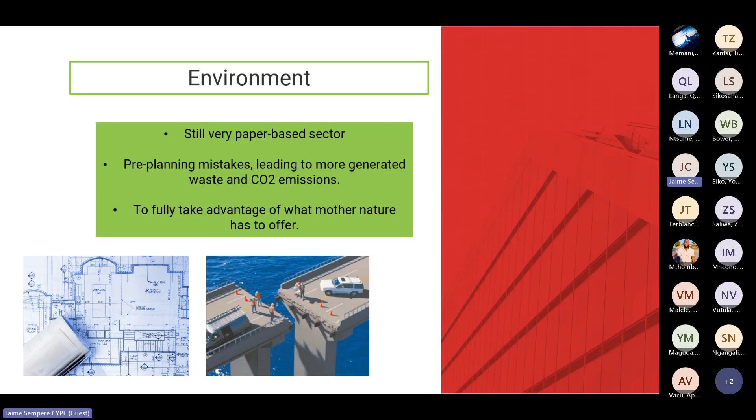And let's not even talk about mistakes in planning from not being able to visualize and properly view information, leading to waste or CO2 emissions. You have no idea how expensive it is to take down structures, or how much waste you can generate, or CO2 emissions from a structure that's improperly designed. In 2025, all structures and projects in Malaysia and many parts of Asia will have to present carbon CO2 emissions released by their projects to get approved.

And then the next one, which should be the most important, is that when you digitalize and use OpenBIM, you're able to pre-visualize at many points your project and fully take advantage of everything that Mother Nature has to offer—to use solar panels, to avoid direct sunlight in certain areas if needed. I'll show you how this is done by creating BIM projects, by creating a digital project, because it's not just a 3D model, it's a 3D model with information.

Now, the next one is government, and like I said, this is what's going to get everybody going because nobody's willing to do anything until they get fined by the government or aren't able to work. So very soon it's going to be mandatory in many parts. A lot of you working in or studying in South Africa are going to end up going to many parts of Europe, because they know there are a lot of good engineers and quantity surveyors, etc., coming out of South Africa.

So it's common to go into other countries, and you're going to have to face this and know how to use this because it's going to be the law. It's important to learn a common file and use the common file, which is the one that's being accepted by governing bodies, such as the IFC file, which is industry foundation classes, as I mentioned.

And why does the government want this? Well, like I said, this is the entry point into smart cities and future access to information. They're going to be able to access information in the future and be able to use augmented and virtual reality tools and all of that information that's inside the BIM projects.

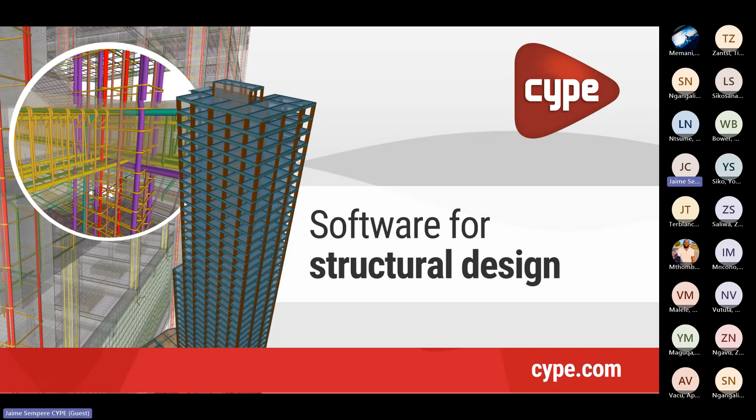Now, in the software, also, you're able to design not just general stuff for your structure, but you could get into details. You're also able to use software, and this software is also free, and this software goes very well with the architectural programs.

For once that you have designed a structure or an architectural model, let's say, now you're able to enter construction elements to that structure, and you're able to do an energy simulation and analyze how much energy consumption you're going to consume. You could calculate the entire energy demand for that for the entire year.

Okay. For any part of the world, it has actually this program loaded, the Energy Plus engine, that it has pretty much any part of the world for you to do this energy calculation.

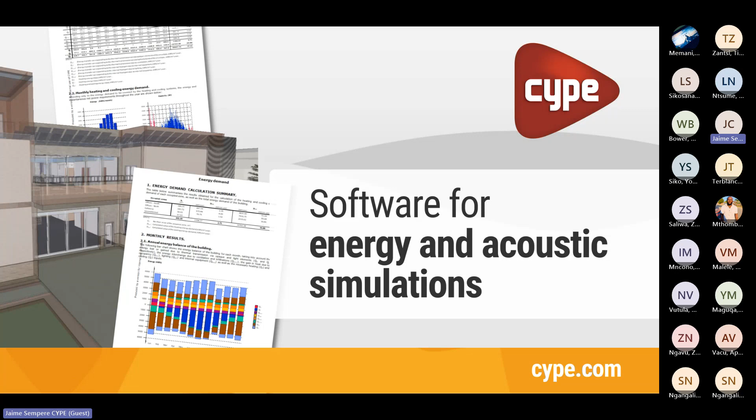Then, once you've figured out how much energy demand you have, you can design your electrical installations, and you can also install photovoltaic installations as well. And since you have designed the energy consumption needs, the program will automatically read those needs and design based on those needs. It's not just like click and that's it. You gotta obviously have some knowledge to preset the program properly, but it will recognize the energy consumption.

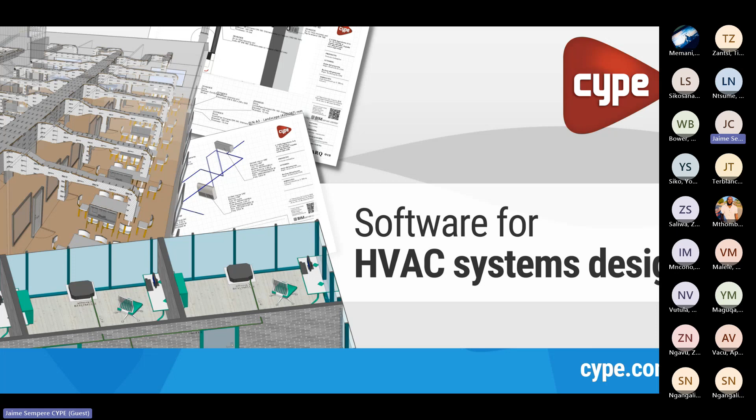Okay. For HVAC, the same thing. You're going to predetermine your thermal load consumption, how much your heating and cooling needs are for your structures. And when you design your HVAC, as you design it, it will be based on those needs that it is recognizing from the area because you have pre-designed that area with a BIM solution.

And I could go on and on with the rest of the installation, but I think you understand it, and fire, pretty much the same thing.

Now, the last one, and one of the things that I also think are very, very useful for you, is that you can do a lot of project management things with this as well. At any point of the structure, it could be the project management part at the structural end, or only at the plumbing, only for HVAC, or for the entire project, okay?

You could do two things. You could design all your health and safety, but then the other thing is that you can create or load a cost database, and you can generate a BOQ quite easily with the software.

Now, if you're working with a BIM model, guess what? All of the geometry and all of the measurements are automatically imported, not just the amounts, but also areas, and it could recognize measurement for the entire area. But again, if you're working from a 2D CAD drawing, you are also able to import that drawing and measure and link it to the cost database, which I will show you as well.

Okay. Now, as I said, how does this happen? Well, CYPE develops the tools that can design and can analyze whenever possible. And once they do that, either one or both, they create a file. It's a BIM file because it's a common exchange file. We're creating an IFC file. And you are able to share this file in BIM Server Center.

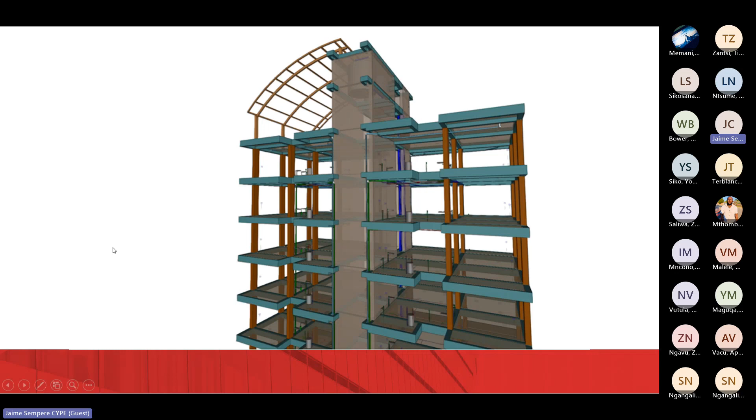Now, as I said, the project can be done of many parts, just one part, but pretty much a BIM project can be everything, including, believe it or not, even appliances. So when you design, or even the toilet, the sinks, when you are working in a BIM project and it recognizes the consumption of that element, it will require a pipe with X consumption, and if not, it will tell you it's wrong because it is recognizing by the BIM model the consumption of that appliance or that particular part of the toilet or kitchen, okay?

So now the way that this works is that every file is a separate file. They are all federated files, and some of the things that people think about when they work with this workflow is that, oh, they're going to steal my information. No, that is impossible. Whoever creates the project is the one that controls the project itself.

But now, if I am an architect and I give the plumber my architectural model and I tell him, okay, design the plumbing for this project, he designs it based on my digital model, my BIM model. It's actually my architectural BIM model, because that's where you've got to start from, some geometry. And he gives me a design. The design that he gives me is controlled by him. All I can do is view it. I can't make any changes.

And now, if I have 3 or 4 people quoting me different options in plumbing, they can all send me those options and I'll visualize and choose which one I like best, and then I will lock it into my project. But they are all loose, federated models. So, like I said, a BIM project in BIM Server Center or in any true BIM tool has to be open to as much or as little information as you'd want. And that's what we offer, okay?

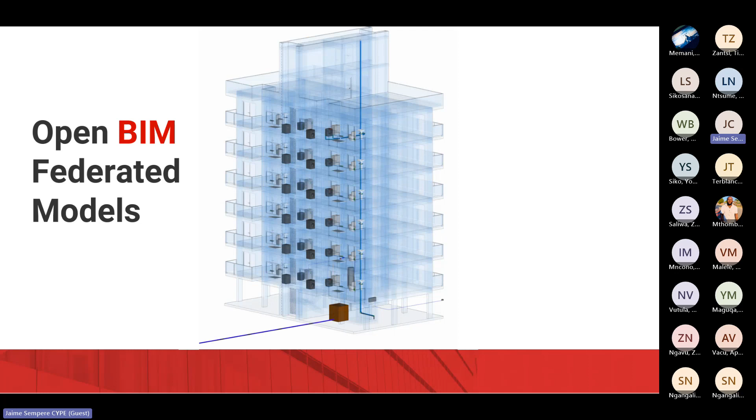As you see, you're working with federated models, so it's impossible for anybody to take any of this information from you. Now, some people think, will I need to change the way I work? No. If you're working right now with other tools, there's no need to change. There's multiple workflows that are very versatile with other solutions; you're able to import everything from a PDF file, JPG file. There's many things you're able to import and have as a starting point, even just a Google Earth picture, etc.

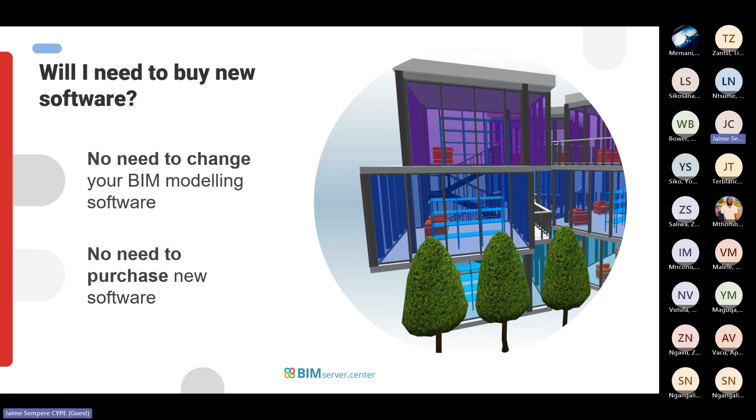Now, people wonder if to work with BIM Server Center, you need to buy anything. No, nothing needs to be bought. Some people wonder why. Well, this was a project that we brought forward after an investigative study with the European community. And one of the things was that this was going to be a fully free platform to actually take advantage of what BIM is supposed to be. And that's what we have done. There's no need to purchase software or anything to use the workflow, okay?

Will I be linked to a special modeler?

A lot of people wonder, because let's face it, most of you are probably looking at this now, and even though we have over 150,000 users worldwide, well, that's nothing compared to Revit, Graphisoft, Allplan; they're obviously massive companies. So if you're working with any of these programs, you're also able to generate a file. With Revit in particular, it's a direct plugin from Revit into BIM Server Center, and it's free, and you're able to share Revit models, the geometry, with Graphisoft, Allplan, etc.

If you want to use a free tool, we also have one that you're able to use, and I'll show you today. It's very simple and quite intuitive to use. Now, these are some of the worldwide companies that use our workflow. I just wanted to share it with you so that you see. And we also develop tools. We develop open BIM tools for a lot of these companies around the world that need open BIM solutions. So we develop their open BIM solution as part of their programs. Mostly here, we're talking about MEP tools that we're developing for these companies.

So with the tools that we're going to show you during our training, all the tools of CYPE, you're always going to be able to generate a 3D model. You're going to be able to generate technical reports. Now, these reports you can print on paper, which is not the ideal thing to do, but if needed, you're always able to do it. Or you're able to share this information in the cloud in a PDF file, and you're able to access it or share it with government institutions as well in a digital format. You're also going to see a lot of visualization tools in our software for you to be able to make the right decision.

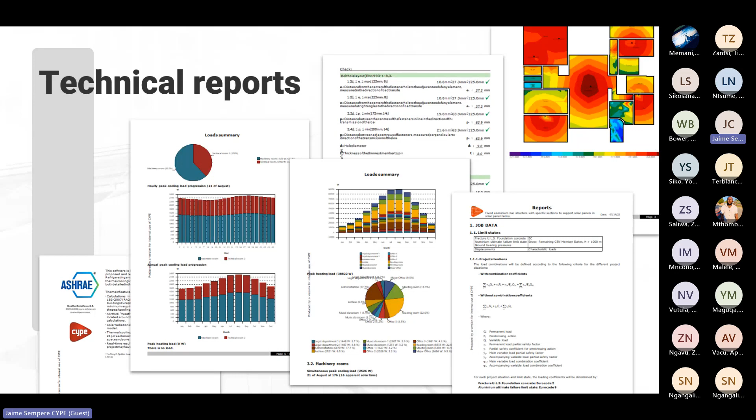And you're also going to be able to generate plans, as we understand that plans are still necessary. So you would be able to generate plans, customize drawings, and these drawings you could have available in the cloud, or you could send them to print. It's also possible, and it's free with our software. And then lastly, you're also going to be able to generate a BOQ.

I just wanted to mention one project that was done with our software. I don't know if you've ever heard of this project, Johan. This is the tallest residential building in all of Europe. It's over 650 feet tall, and it's actually just 20 minutes away from our headquarters in a city called Benidorm.

I was at a conference in Lithuania, and some guy told me, "Oh no, but in the UK there's a building." I just told him, "Look at my slide. It's the tallest residential building in Europe." As we know, the UK did something called Brexit and is no longer part of Europe. This is great for us because we're able to say it's the tallest building in all of Europe. There's nothing else other than the ones in the UK.

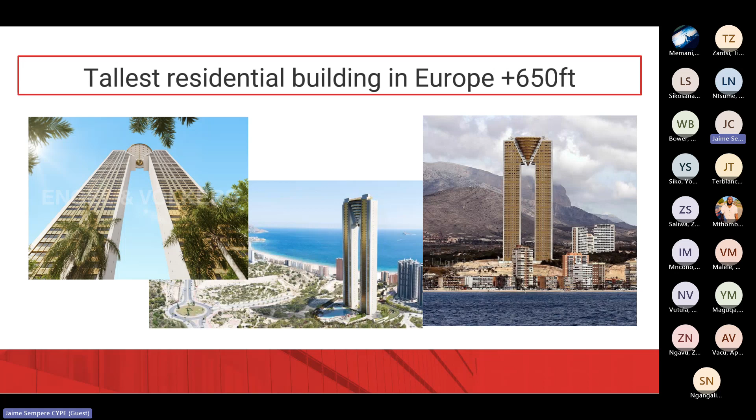But it's a building called Intempo, if any of you look it up in Benidorm. And the whole building was designed and analyzed by one of our owners. So it's just a really interesting project. Now, how I always like to give people the idea of BIM Server Center, of what I'm going to show you, so you get a good grasp of what we offer as an open tool, is, believe it or not, this here.

I don't know if any of you ever watched Power Rangers, but this was a series that my kids used to watch when they were younger. During the episodes there were separate superheroes, but at the end of the episode, they would all gather and become a special superhero that could do everything that they needed. Well, that's what you could do with BIM Server Center. It could be a customized tool for exactly whatever you're doing, whether that's structural design, architecture, project management, only designing the BOQ, etc. And I'm going to show you how that's going to happen.

Okay, so now the first thing that I'm going to do, let me just confirm that everybody's still seeing my screen, I presume, right? Because I saw that there was some sort of change happening there.

Yes? Yes, I think we can see your screen. You took your screen down and now you... Yeah, now I have my part here. Okay, just my home screen up.

Yeah, all right. So, anyways, the first thing I'm going to show you is what the CDE platform is and how to start a BIM project. You can see here on the right of my screen there's a bunch of different loose tools. These are different BIM tools that I have downloaded and that I use, okay?

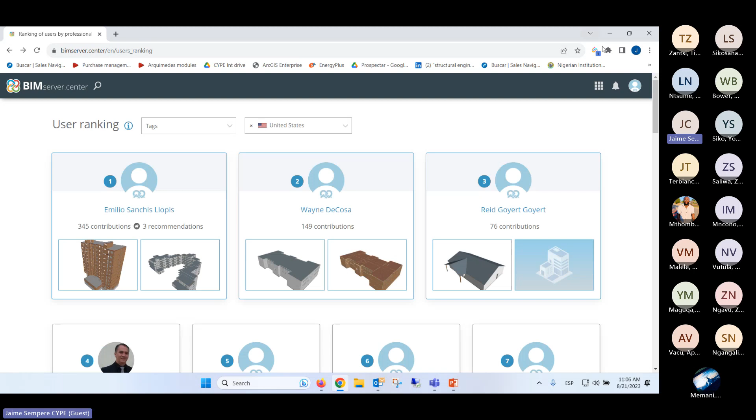Let's look at the important stuff of having a BIM modeler here. Okay, so what happens in here? I have the projects that I have shared that I've designed with some of the tools that I'm going to show you now. In a few minutes, I'll start showing you some of those tools. Anything that I designed in there is going to be here. Any projects that I've started, etc. And that's what I'm going to go ahead and show you.

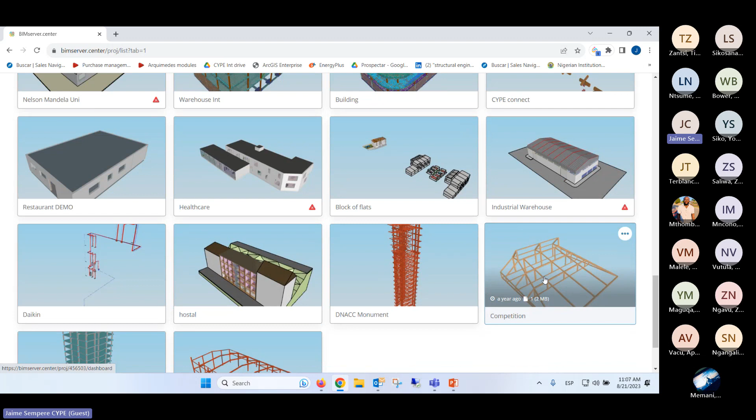And now this will be the same thing I'd be able to access from a cloud. From any cloud platform, I will be able to enter and access and view any of these projects. As you see, some of them I have an entire structure here of a short span bridge. Here I have a culvert house. I have steel structural elements. I have mixed warehouses, but I also have, for example, just complex connections that I designed. I can have also here a project that is a truss roof. There's no limit in this, is pretty much the idea.

And now I'm going to go ahead and just give you an idea, like this project that we did at one point called South African Experience. And here we have the dashboard, South Africa's BIM experience that we did at one point. And here we have activity, information, etc. So in here I have the visualizer where I'm able to view the whole entire model. I could see everything in one shot here, or the viewer allows me to pick and choose certain models.

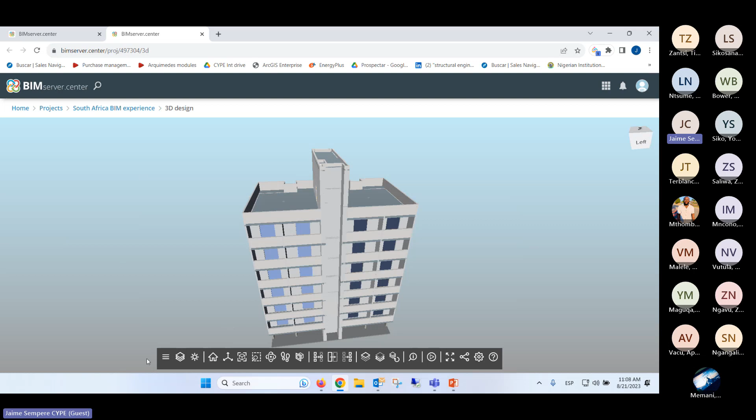You see, I can have everything visible, or I could just ask for the architectural model, press accept, and that's it. I only see the architectural model. Just here so that you see a quick example of this. But now obviously there's more things that you're able to do with this. It's not just about visualizing this model, because there's obviously a lot more things that you might want to be able to visualize. In here you have the dashboard where you're able to view the model and see everything one on top of the other.

Then you have a notification dashboard. In the notification dashboard is where you can visually create issues that need to be resolved, or automatically you would create issues via clash detection software that we also offer. In the contributions tab, you would have all of the different files. You see they are all loose, separate, federated files that make up this project, from the architectural stairs and ramps, the carpentry. The great thing is that once you have the architectural BIM model like this shared with your team, now everybody can start designing based on that geometry.

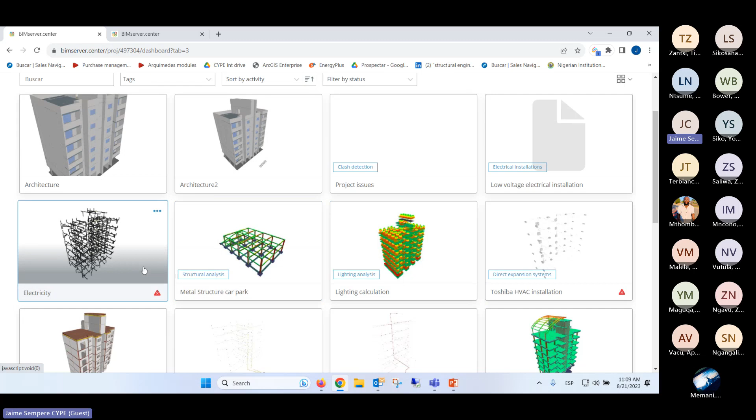Let's say we have 3 or 4 different designs for both the doors and windows. Once I decided which one I want, I lock that one in place, and that's it. And I have all this information that I'm able to view from any viewer around the world. I can go into any platform and see all this information, wherever it is. So you have all of these different files here inside this cloud for you to visualize separately as well. And then here you have your work team.

And your work team is very simple to use. This is the work team that exists right now. I'm able to just go in here and look for people. Obviously Johan's not here, but if you're registered in BIM Server Center, I will be able to search for you, and I would be able to easily invite you, or I can copy the link and send you an invitation as well. It's very, very simple.

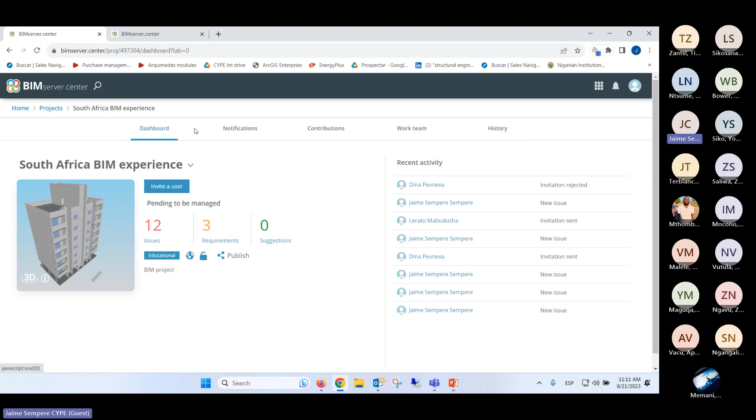So the great thing is that one of the things I always needed to do is keep information, make sure that everything was registered. And this was always doing this automatically for you. So any information that you share via this platform is automatically going to be registered. So I can, for example, say, okay, I have an issue right now with the architectural model, and I could

just put architectural, let's see, windows need to be placed 3 cm from the edge. Okay, and now I can say, okay, so who do I have? Do I have the architect change the entire building, or I just tell the carpenter? That's it. I inform the carpenter.

Here I give him a little bit more information. Please place the windows, let's say it's on the last floor, 3 cm from the edge, and I could give him all sorts of instructions here, okay? Now, let's say that I have to show him because I want to give him a little picture of this and tell him what exactly I want him to be looking at, okay?

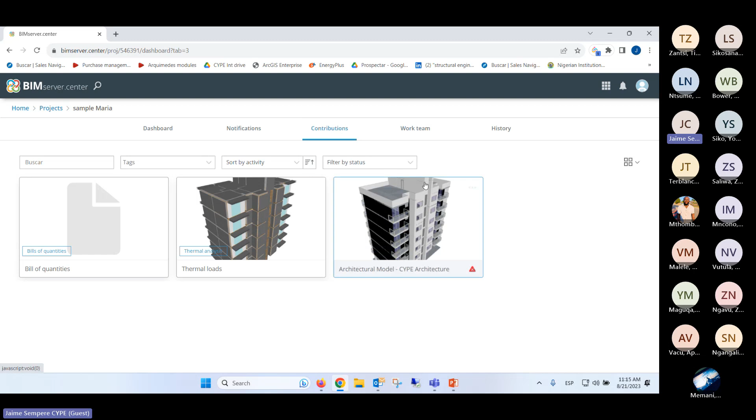Well, it's not only information such as models for visualization, but also paper, to be able to access files. So you see, this is the same building, but in this model, I only have an architectural model. I have the thermal loads design, and I have the bill of quantities.

So you see, I'm able to design my bill of quantities and then create a BOQ summary, cost breakdown, detailed price, all three of these, and just share these in a cloud for me to be able to visualize anywhere and print if I so need, or present to an administrative governing body what I'm doing. There's a lot of different options, and it's not just documents, it's not just visualization of a 3D model, it's also all the information that is within.

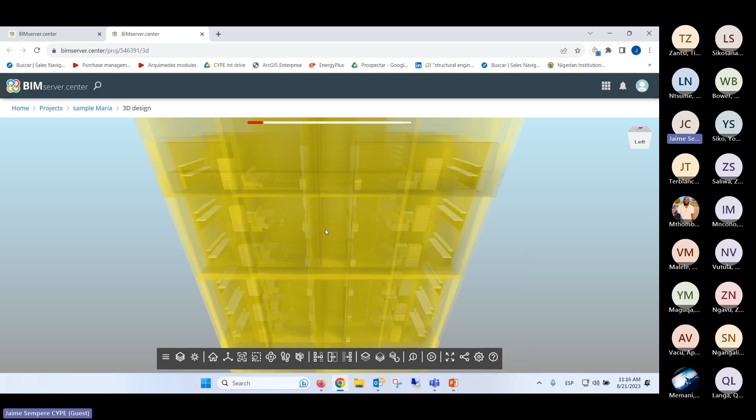Okay, and now I'm going to show you, when it comes to the visualizer, you have some very handy tools that are going to be excellent for you to determine the location of your project. And you will see here in this model that I have shared what is the I in BIM, and that is the information inside the model. Now, a building model doesn't have information of each and every part of this project, and that is the big difference with these models that I'm showing you now here.

So you have a section that says I for information, and if I come here anywhere, it's going to tell us what it is. Let's say this here, for example, is a railing: the height of the railing, type of category, the spacing, the handrail dimension. There's a lot of different things that it's able to see. Now, it also gives me the opportunity to remove areas, so I can go here and say, okay, remove this project.

I've already taken that into account. Let's see the next one. Okay, I've already got this one. Or I could just say, remove everything and just leave this for me to visualize this particular information, or this particular model. It gives you an option to isolate an element, hide an element, or show all of the hidden elements.

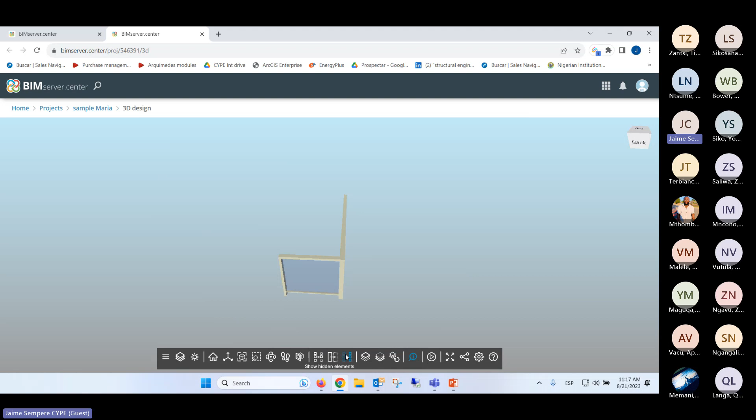Now, another very interesting thing for this modeler is that you have information on all of the different parts of the project, including the louvered walls. These are external windows. It tells you, every single piece of information is here. And also, it's able to set the shadows of the building.

Based on the position, I have a way of locating the project. You can actually locate it here, or if not, we would show you a way for you to obtain the location of it. This one is already placed, and I can activate shadows, and show the position of the sun as well.

So this is based at 12 p.m. on the 21st of August. It always goes automatically on the day we're at today. You will see, based on the sun position, this is the type of shading that I'm going to expect. Now I can easily change this by changing the time. Say I could just change it to 9 in the morning, press accept.

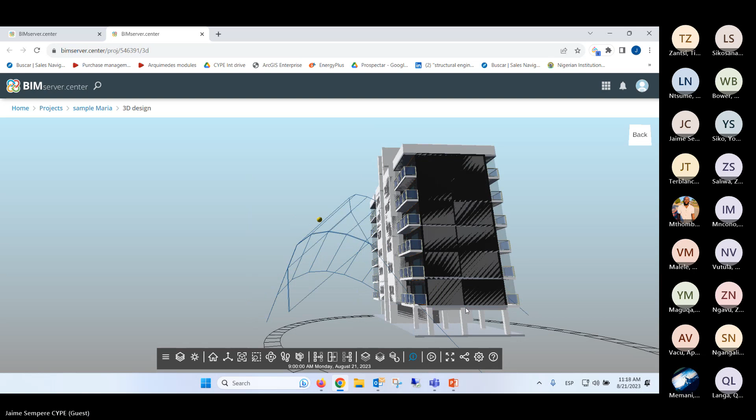I think you got the idea here. You could put it later in the afternoon.

You're also able to have the program check all of the different... I suggest that when you go here into BIM Server Center, we have this here for you to know how to rotate the camera, like what I'm doing to rotate this, you can change it. It's either Shift key plus middle mouse, or Shift key plus left mouse. You can switch it to that.

Also, if you have any questions regarding this, for example, you can see you rotate, hold down, move, hold the middle button, so it gives you different things for you to have an idea. And for shadows, if you hold down the Alt key and drag while pressing down the mouse...

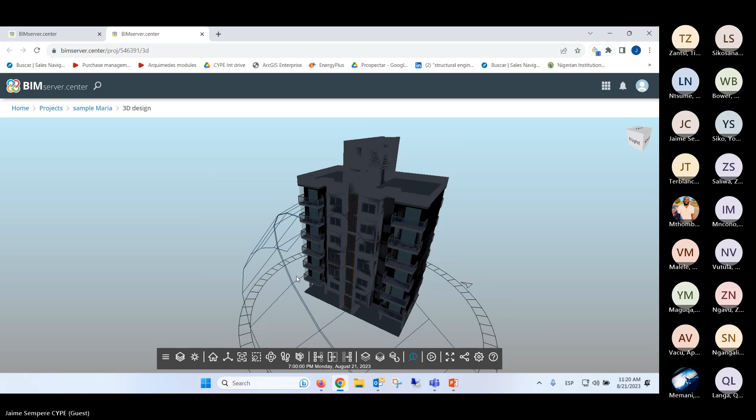So you will see that if I do that, I can automatically move the sun in one shot and check the shadows. Okay, let me show you this model, for example.

We have a section where they share models with us as well, and you're able to access them. I actually have not contributed to any of these, but these are shared models for me, and you can see there are some really nice models here. But there's this one building that I wanted to show you that I think is quite interesting for you to view.

Actually, sorry, I did contribute to this project, so my mistake.

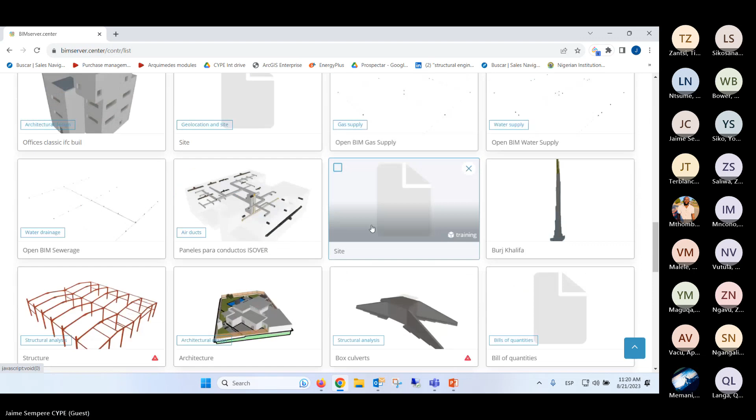All right, let me just show you one last thing with this, and then I'm going to go ahead and open up the first tool for you guys to see.

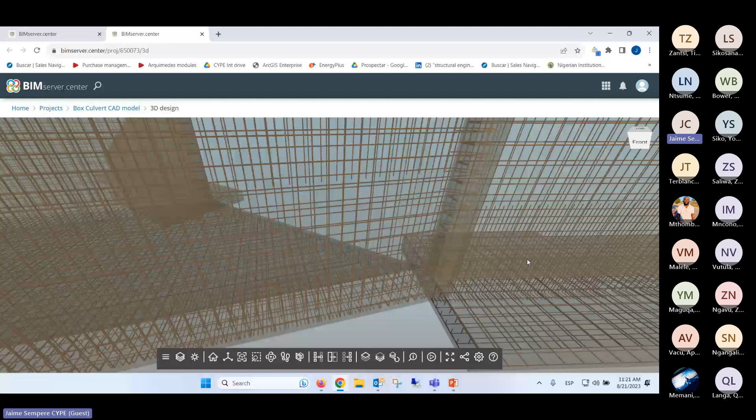You will see that it's not just random stuff that I'm looking at that has no value in a project. If you're designing this project, and you are working on a culvert in the middle of nowhere, well, hopefully you have access to internet at least at some point.

You can enter and just check the exact steel that you need to be using, to make sure you're using the right thing. You see, I imported the entire rebar model. I know this is a number 10, I know this is a number 16, and I'm able to not just import visual stuff that might have less use, but also get information here that at any point is going to be very useful to me.

When you import into this platform, you also have this walk option, and you're able to walk into the project itself and visualize all the elements that are inside the building when it comes to architectural design. Let me show you in this project.

And it's a matter of going into any of them, when you're in the visualizer, you just enter the part where you see the steps that says walk. You determine the height where you're going to walk into the building. I also like to turn on the information display so I can visualize the information. So now I'm going to be at this level. Let's come on in.

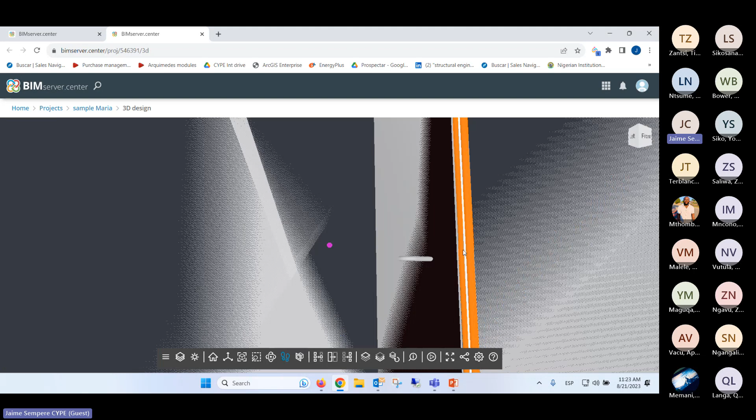Okay, well here we are in this room, and inside this room I'm able to get any information, for example here you see this is a door, the height or whatever, okay, this is a television. So again, this is the great usefulness, and all this that I'm showing you is in a cloud, okay?

So now, how do I start a project? I'm going to go ahead and start a project from scratch with you guys, and then we're going to share a couple of models into it, okay? So that you see, let's see how much time we would have into it.

So it will be as simple as you create an account, and then you go into the part of projects and you select, hey, imagine, new project. Do you think that's the button? Yes, that is the button.

Okay, so we go ahead, and this is important, the name that you're gonna have, so I'm gonna put Nelson Mandela. It's already giving me a recommendation because I had used this before, okay? And I could go ahead and choose it, and, no.

Okay, now the description, okay? Just gonna put a trial project.

Now this is a part some people start wondering, what should I select here? When you're working, just choose educational version. It's probably going to be the best for you to have access to everything, or you could choose professional. It really doesn't matter, you're going to be able to store information here just as well. It's for whatever use you want.

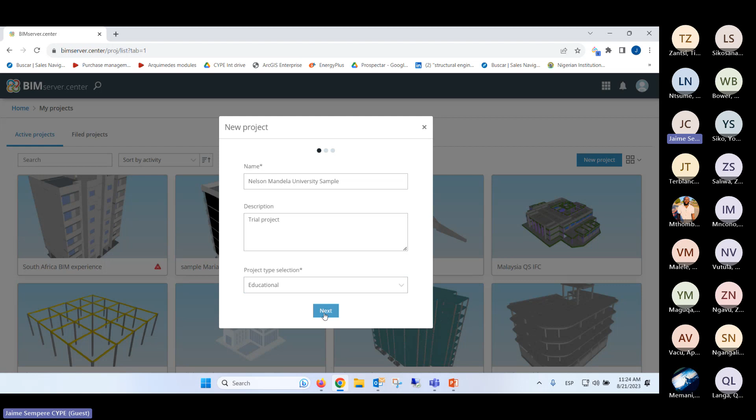Now this next section is important. This is where you're going to be able to have, because I had a lot of people, you saw many projects that were there shared, but the part of the sharing is not up to us, it's up to you. So you're able to have the projects open for everybody to visualize, or not visible, fully closed. That's up to you. I'm going to leave it open because I'm going to share the project.

Okay, collaboration requests as well. I can have people reach out to me and say, hey, can I collaborate in this project or not? Again, this is fully open to you, and there's no change in price. It's what you like, okay.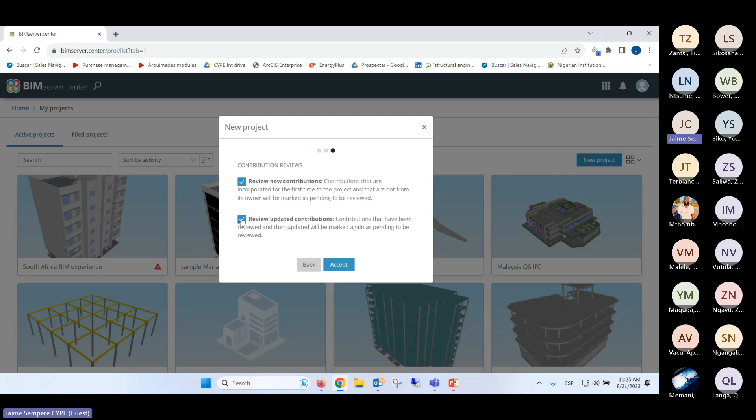Next, you can see if you would like to review new contributions or updated contributions, okay? So any contribution to the project, if I say that I want to review it, nobody will be able to load anything or update anything without me saying that it's okay. So I'm going to go ahead and say that.

So now I press accept, and you see there's already a project here started called Nelson Mandela University Sample, whatever. But where do we start? How do we start? Well, I'm going to go ahead and go into this platform that the wonderful government of South Africa created for you guys, which is some sort of portal.

I think it's this platform, I imagine, Joanne, for the GIS location. I'm sure some of you might have seen it. If not, okay, I'll share it with you guys. It's busy opening here, let me see what you've got. Still opening... yes.

So let's say, for example, we are able to do different things with this. Let me put Nelson Mandela University. Okay, so this is a platform like we have in Spain as well, we have a cadaster for the properties. Okay, so here, for example, is the area of your school, more or less. And in this platform we're able to go ahead and visualize pretty much any part of the country.

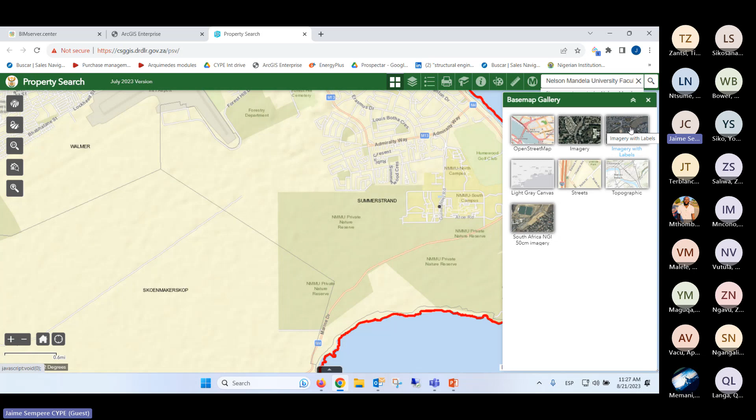Okay, and I'm going to go ahead and put imagery with labels on it, just for a goof. I will go here into this North Campus, and let's say I'm looking to create a little project somewhere in here, in this open space that there is in the campus.

Okay, now you see it's giving me here the location, the degree, everything here on the bottom left, okay, the exact location with longitude, latitude, which I could enter manually. And then here I have also the scale, the scalability of this.

I'm going to put it a little bit less so it's not such a massive area, okay, let's put it at 600 feet, for example. Okay, you guys are using feet over there? I thought you'd be using meters.

Okay, let's put it here. We're actually using meters, not feet. Well, for some reason your governing body here is putting feet, but there might be a button somewhere to change it to metric. Okay, let me see a measurement. Or whatever, it doesn't matter, we'll leave it this way.

So now, let's say I can use different things to map a project and start from OpenBIM Site, but I can simply take a snap picture of this image here. I don't like that it shows results that way, so let's go ahead and just re-snap it a little bit smaller.

Okay, and I have that part which, no, I need to get that section at least included.

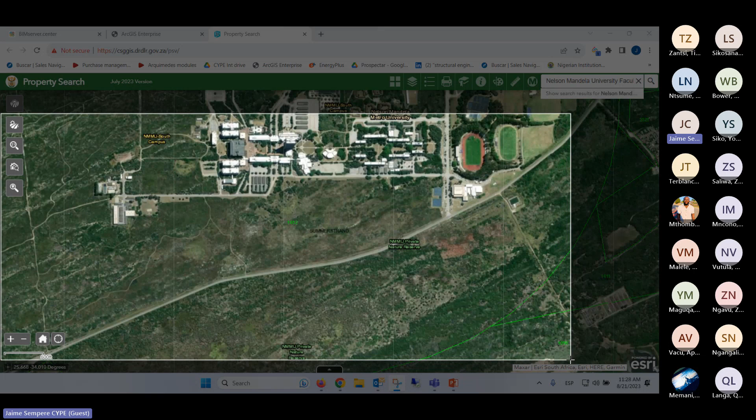So I'm just going to go ahead and create a file, and I'm going to have a PNG file saved on my desktop of this.

So now I'm going to go ahead and open up one of our software programs. I had shared with you a few programs, let me show you the ones that I shared.

It had to be the last one, of course. So we have here pretty much these four models that we shared in the last training. I think this one isn't in here, but it doesn't matter.

I'm going to go ahead and start from this one in particular, which is OpenBIM Site. This is an application for you to site the initial project location. With this, it's great in a BIM tool because you're also able to define other geographical information, and you'll be able to take that into account when designing your project.

So once I've downloaded the software from BIM Server Center, I'll have it right here available on my desktop. So I'll go into this program, OpenBIM Site, as you see. Once you register and download it, you'll have it directly here on your desktop, the same way I have this other software.

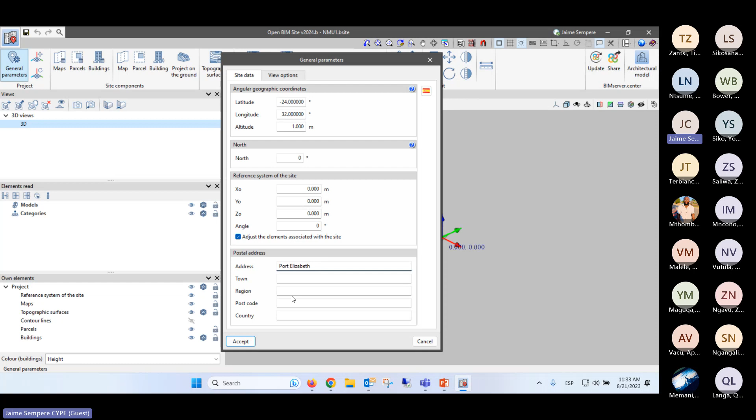Also here you put your northern point. I really am not sure how to work in this part. So here we could just put the address, for example, and press accept, whatever.

So now I just don't have anything here at the current time in this project for me to visualize, and after that, here I have the way to move the reference of the system site, how to put the correct location. Now, once I put in the map, what I'm going to do is import a template into here. We're able to always import templates into all of our software.

We're able to import DXF, DWGs, but we're also able to import, like I said, any common file, such as JPEG, JPG, BMP, etc. We can import all of these files. So I go ahead and I bring in that screenshot that I had. So you can see this is the image, but obviously this is not scaled yet. So how do I scale it?

Well, it's very simple. You come into this area that says select the visible area of the template. And in this area, you can do two things. You can change the origin of the coordinates of the template. I could go ahead and tell it the origin of the coordinates are right here, so we know it's in the same place. And now I can adjust the scale of the template.

So you remember I had done here originally this 600. So I could go ahead and tell the program, from here to here, it's a meter, so it's fine. I just go ahead. Feet to meters. We said it was 600. Okay, so let's check it. Here's 600.

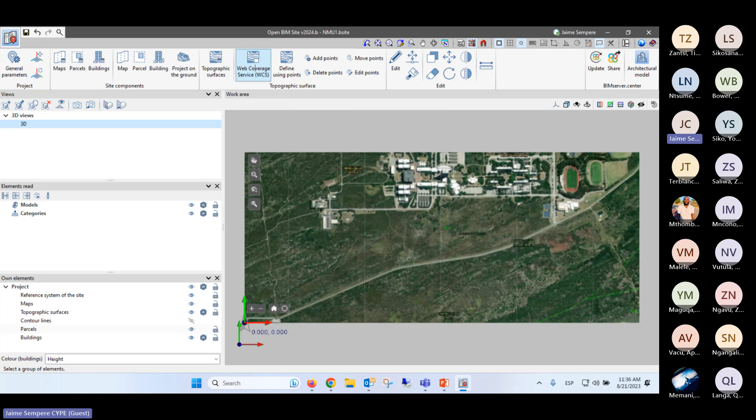Or if we have a web coverage service that imports the topography automatically, which in this case here we don't. We don't have it designed yet, but there's a way to manually enter it. So now once I've said this is the site, the topography that I'm going to use, I go ahead and share this information. Now it's going to ask me to select the project. I'm going to select this one, which is Nelson Mandela University sample. I press accept.

The name of this file is the site. I could put a description, like, I don't know, image, say, from the South African cadastre, so I know what image it is, etc. I press accept. And now, this is BIM workflow. This is what it is. I just shared information. The information is still here.

This is my project. Okay, I'm going to close my project. It's saved as whatever it is. Okay, and that's it. It's here, and I don't have to worry about this project anymore. Now let's take a look at BIM Server Center, and let's see what's happening in BIM Server Center at this present time. We go into the store. Obviously, that's not where we want to look. We're going to go into my projects. I have Nelson Mandela sample here. You would have this in your my projects.

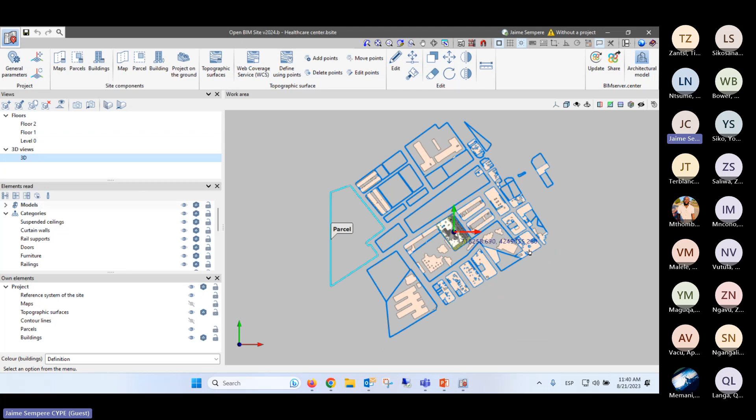So here you see that we have another model. As you see, we can break this down into floors of each section, or we could see an entire 3D model of this. And here we have a project that we imported from the Spanish cadastre, and the buildings that are around have information of the height. For the buildings around the property that you enter, you just give it a general reference of the number of floors, the numbers from the ground floor, and the numbers below, etc. The rest of the information is really not needed. So that's what you're seeing in the surrounding buildings.

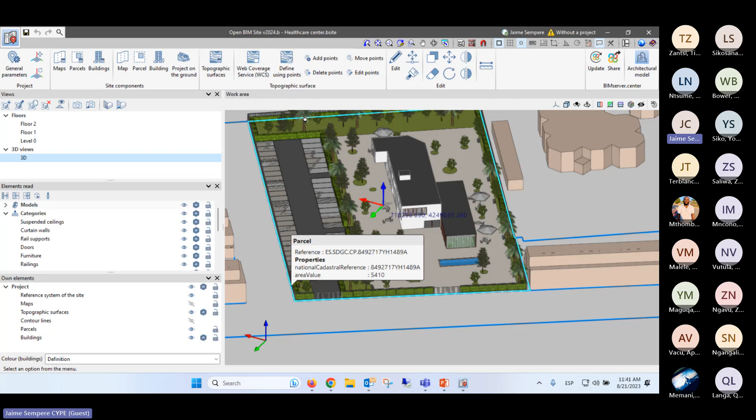And now in the building that we have actually entered, here you're able to see exact information: the parcel, the area value based on the cadastre, etc. So here you're able to see very detailed information on it. And as you can see, the surrounding buildings, the same type of thing. Let me go back to BIM Server Center one second to see if this has already been loaded, and then we're going to move on to loading or designing an architectural model, and then we will finish it up with generating a BOQ.

So let me go ahead and start up CYPE Architecture, which is just going to be one second. And then let me just visualize this again, which should already... Okay, perfect. So now here we're in CYPE Architecture. And in CYPE Architecture, we're going to use one of the examples, and from the examples we're going to import a model. So we're going to export one of these examples into the model that we've already created. So let's go into the site model that we've already created. And I'm also going to show you how to work a little bit with this modeler itself, okay?

So when we're using the examples, if you want to mess with one of the examples and make some changes, etc., so that you don't have to reload them the way that I'm doing, and it's just a quicker load, you would be able to just save it once you start, and then just work off that saved model that you've done. So I'm going to go ahead and choose this single family detached house model, okay?

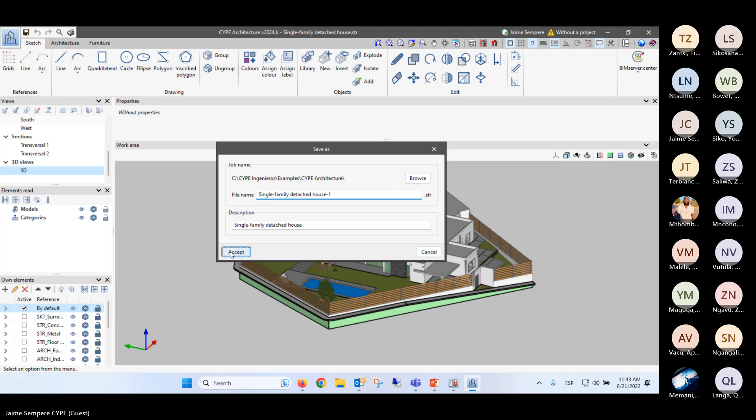And in here, you're going to see that you have the model that's already imported, and you just come here and we're going to save this file, okay? And that's it. So now we have here a little model that's already been pre-designed with CYPE Architecture, and CYPE Architecture is our solution for designing pretty much architectural models, okay?

But now you will see that these architectural models become smart elements that have information within them that can be taken into account at many other parts of the project. For example, this wall, you see there's a reference, there's the type of facade, there's a height, there's a thickness, etc. When you're going into glazing, the type of glazing, the amount of layers, pretty much everything. When you're looking at structural elements, the same thing, okay?

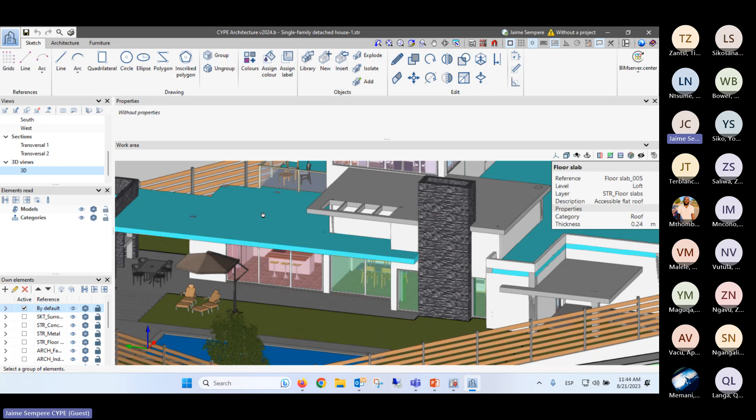So now in this program, you can see that we work in the following way. We have a sketch tab, an architecture tab, and a furniture tab. We're able to work directly from the architecture tab, or we could start with sketches, and then from those sketches, end up designing something else. So let me give you an idea of how that is.

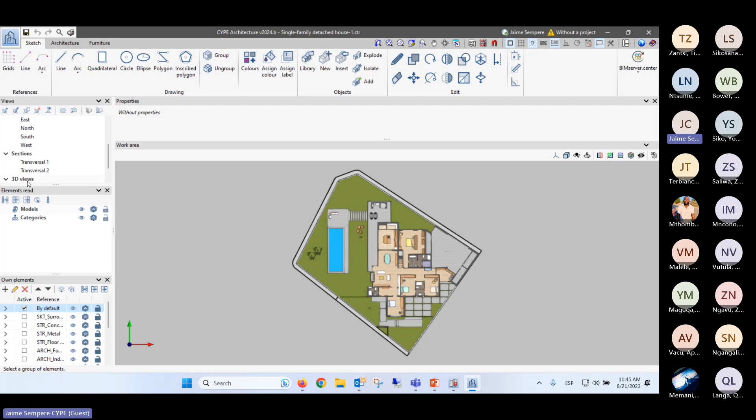Okay, so we have different views. As you can see here, there's a tab that says views, and you could create different views like a roof view, loft, etc. You can do many different elevation views as well. Or you could just be on your 3D view. On this particular point, I was going to go into the ground view because I'm going to add some elements in here, but I'd probably be a little bit more comfortable working on the 3D view at this moment.

And let me go ahead and maybe add like a little gazebo back here for us, okay? So there's a couple ways that I can do this. I can start by entering architectural elements directly, or I can start by creating a sketch. I'm gonna go ahead and just enter a couple of architectural elements on here, and I'm gonna start, for example, with a little slab, 4 feet by 4 feet as well.

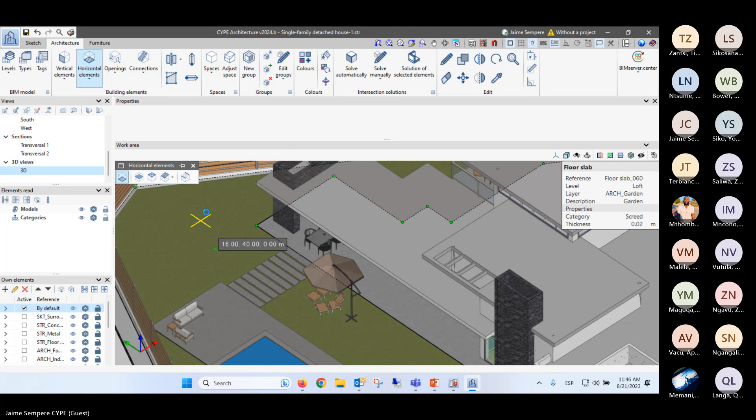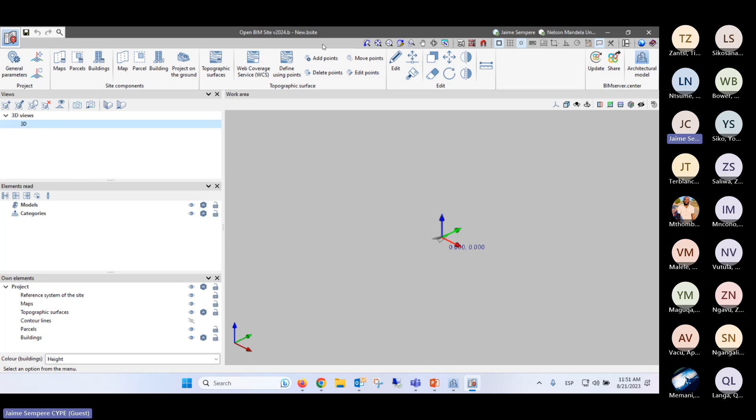Okay, there we go. All right, let's reload that file. I really don't like to not get these things done properly. So just give me 1 second for me to load this another way. Okay. There's always a couple of options for us to do this. So let me just go ahead and reload again this file that we had done before for the site.

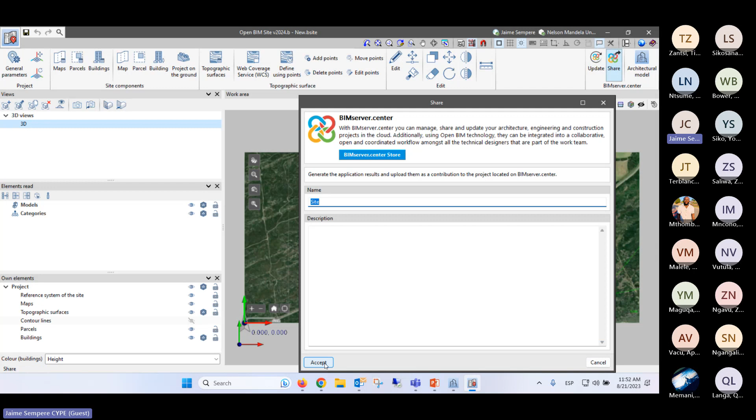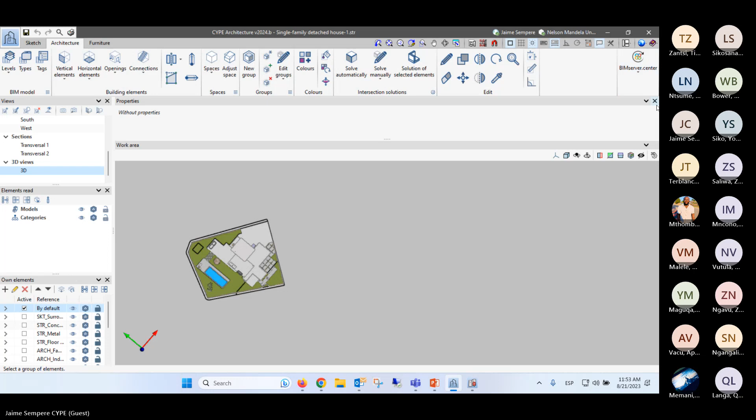Okay, so I'll be able to also import that file into here and also be able to cite it in any of the two projects, both the architectural file, or I can also load the actual file inside this platform. Okay, so now it was already imported. And now, apologies, I'm just going to load this in and we're going to move on to the part of the BOQ, which I know is quite interesting to a lot of you.

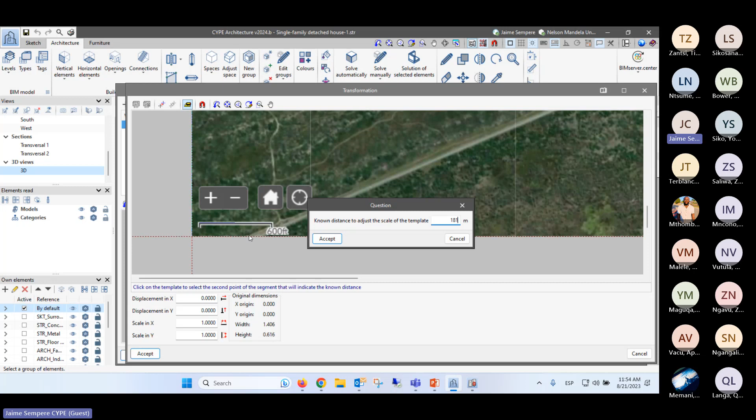I just want to show you how we can link with this imagery that we had previously loaded. Let's resize this. Okay, and it was just because of the scaling. I have a lot of experience working with this software, but anyways, there's certain things that take a little bit of a process. Okay, so anyways, I was able to finally import this model, together with this little house here.

And there's different ways for you to view it. I don't understand why it hasn't loaded yet into this. As you can see, the model itself has loaded into the platform that I shared, because this is the project that we were looking at. And now when I go into this area, we would be able to visualize it. Instead of visualizing it inside the architectural modeler, where you see the model that I had originally, now we have it loaded in BIM Server Center, which is the single family detached house.

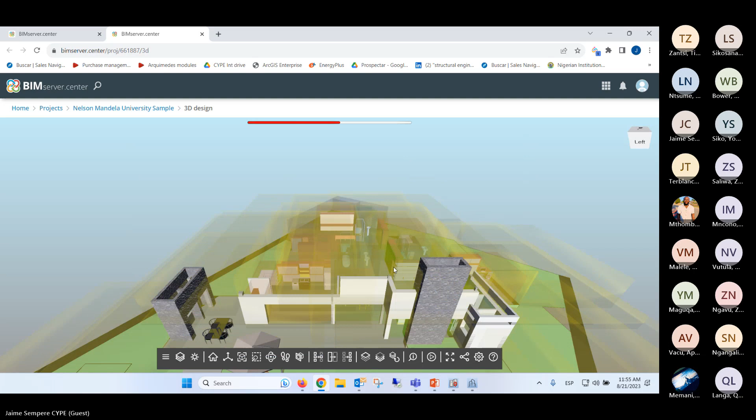All right. And you have all of these elements that have been automatically loaded. Now this is a digital model. This is in the CDE platform where I'm visualizing it. And over here is in the actual program itself. You could see that there are obviously some differences of what you're seeing from one to the other. This is the entire project here in the CDE platform. Now in here, you pretty much have the same information as you did on the other one.

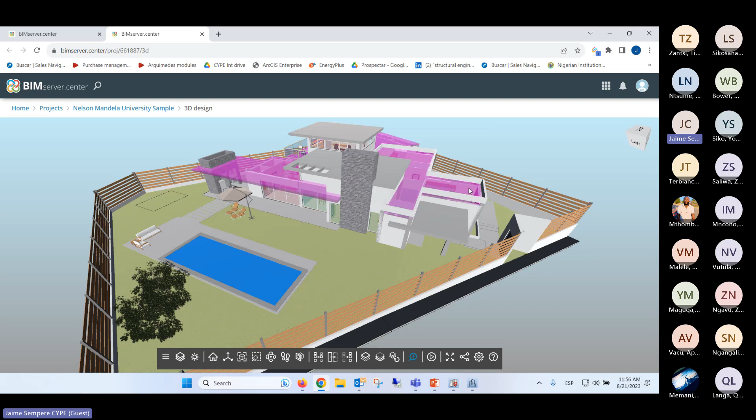You have the ability to use the shading, and you obviously have all this information here that you're also able to get, okay? So now let's say that I have already designed this project, the site location. I'm not gonna lie to you guys, something's happened and I have to figure out why it hasn't been imported, but I don't want to waste any more time on it, it's a mistake, I'm sure, on my part. But I should have the site loaded here as well.

But now I want to go ahead and do a digital database. I want to go ahead and do a digital bill of quantities of this project, okay? And I want to go ahead and open up this project now in another modeler that I have and be able to add a BOQ.

Okay, so that would also be able to be done. And the great thing is that since this is a BIM model, all this information that is in here, quantity-wise, you are going to be able to access all of that information, and you are going to be able to extract quantities as many times as you need to calculate and analyze the amount of quantities that you need for the project. So let's go ahead and show you how that is done.

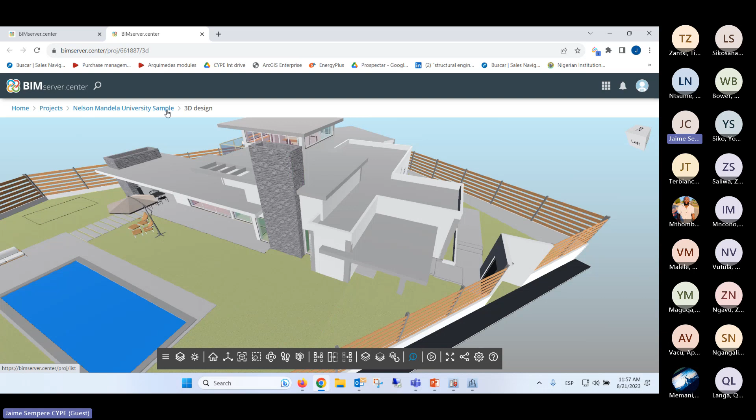So we have the model loaded as a project called Nelson Mandela University Sample in our cloud. I'm going to go ahead and close both of these softwares down. And I'm going to open up a program that we have called Open BIM Quantities, where you can generate a bill of quantities by creating a cost database, entering a cost database from an Excel spreadsheet, and then entering a certain set of measurement rules for you to digitally measure your project or manually measure your project. Both possibilities can be done. So I'm going to show you now.

So Open BIM Quantities, the same thing as when you open, you have this workflow file, recent files, and if there's a user's manual, like in this software, you have access to the user's manual over here. So let's go ahead and start from a new project. At least a new project for the program itself, but we're actually going to link to a BIM project, and we're going to press here, select BIM project. And we're going to press this example.

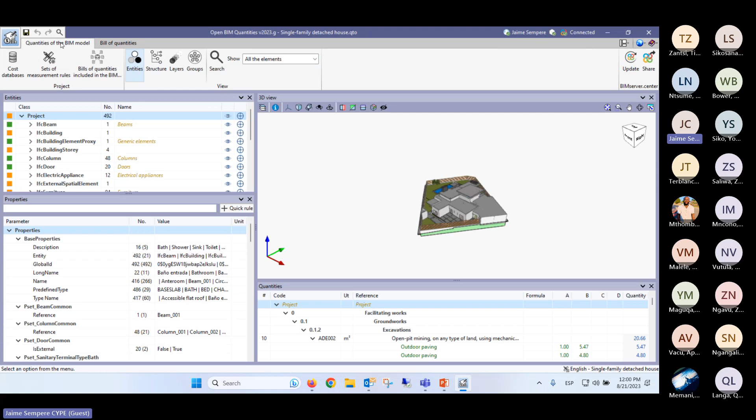Now, if you are starting from a BIM model itself, you could start from here and it's going to be a lot easier. So you'll see the project has imported all of this different information from my project, from beams to columns to doors, etc. And you're able to visualize them in different ways. Let me just make the BIM model transparent. And you could see, for example, beams, or in the part that says columns, the project is recognizing all of the columns. In total, there's 48 columns.

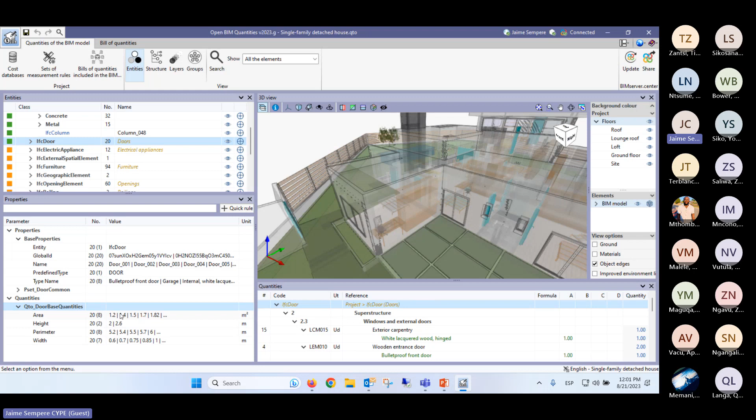And then you can also, if you want, request the size of one column, and in the part of quantity, it's automatically extracting the cross-section area, the surface area, gross volume, length. Now, there's many things that you can do for it to extract it in whichever way you want. I can, for example, take into account if I have metal columns separate. I can take into account doors as just single units, but I can also have the measurement of each of the doors, whether it's an area, height, perimeter, width, etc.

And also other parts of the house, for example, the internal white lacquered wood, the surface of the terrace. It could be in sections or it could be in elements. There's many different ways for you to take into account measurement. Or you could just click into any of these sections and you would be able to also check the measurement of it. So you have the model for you to be able to extract the measurements, but you need to have a cost database.

So how does this work? A cost database is quite simple. You could start from one that we have. We already have preloaded two English ones, some Spanish and some French, but it's very simple for you to copy and paste a new one and create a new one.

For example, in this particular training that we did for NMU, I just copied and pasted one of these cost databases, and now we're able to edit it. Just so you see how our cost databases work, it's quite simple.

First, we start under general parameters. You could then take into account any currency. We even have the South African rand included in there. In addition, you can also adapt your decimals in any way that you need.

Now you're able to create a cost database by adding work sections. You could create any work section. Like you see here, the codes they've done are pretty much by letters. I could just say whatever I want for each of these files, and I can create a new file. It's very, very simple.

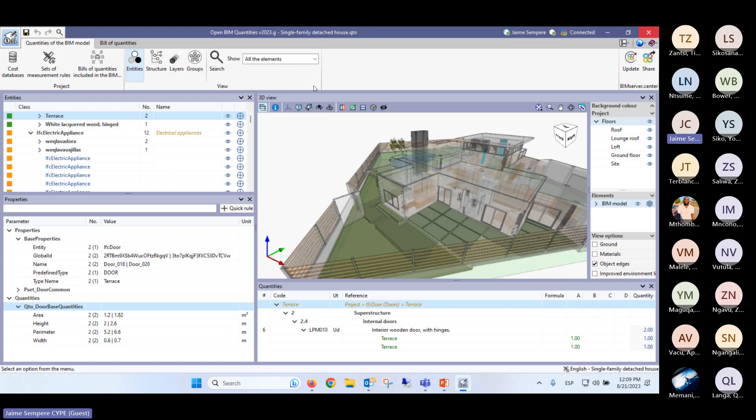So we would be able to use these continuously. I have a link with the cost database—oh, I had the wrong one. So now I'm going to link it to the cost database of the single family detached house just as well. I press accept, okay, and now I have it linked.

And now I go to the next tab, which is my BOQ tab. This is where I'm going to generate a bill of quantities, or where I would start working if I was working in a BIM model or a CAD drawing. So imagine that right now, this is the project that I have. I always have a 3D model, even though it might not look like it, but this is a 3D model.

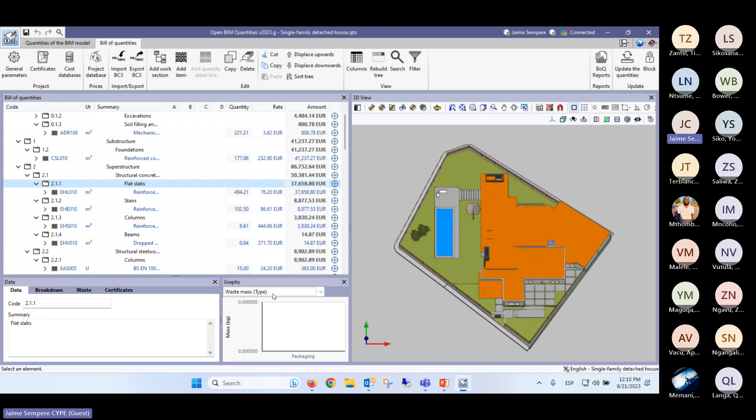And now I have the parameters that I have already preset, and the measurements have been calculated for each of the sections that have been imported directly. You would be able to see that each of the sections has a little graph that can help us with a breakdown, including everything from CO2 emissions, the waste type, the waste volume, and waste mass type. There's a lot of information, and we're able to take a look at these breakdowns if the information is available.

You can see it one by one here. You could see each element, the separate elements, etc. Now, to generate a BOQ, we will go into the section that says Bill of Quantities Report.

We're able to take into account many filters and references. We could have a list of the unit concept without the price, but now I'm going to do here a detailed priced bill of quantities. In the detailed priced bill of quantities, notice we're at 33 pages, and we could go pretty much to any of the parts here. For example, let's take a look at the columns.

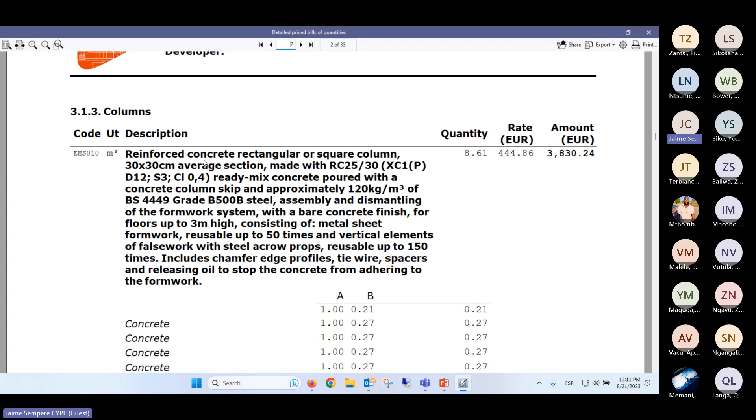You go to the columns and you see the quantities of the columns, the cost, and the rate. This is what one cubic meter is made out of—all of these items—and then all the different items with the measurement of each column. You could have height, width, length, but whichever way you want to do it is fine. You're able to export this in PDF, DOCX, etc., the common files I mentioned, and you're also able to print it. Now let's just see a quantities list, only the quantities list.

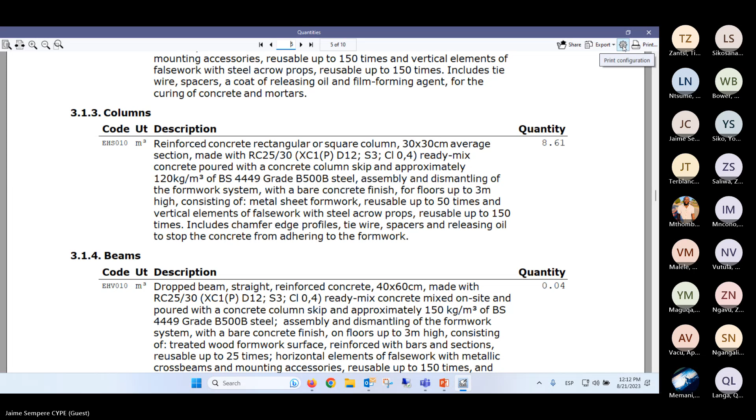Obviously, it's a lot less. Now you see the columns that have only quantities included, okay? Once you finish with all this information, you can go ahead and export this to BIM Server Center, and then we'll be able to do another little model here.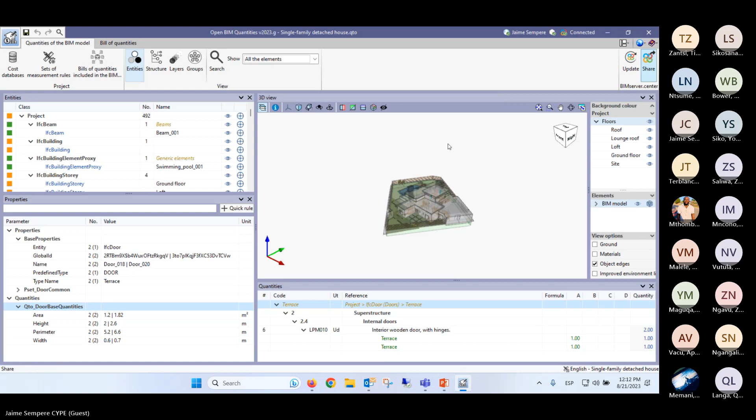So let's go ahead and update the quantities, and then we're gonna export this information to BIM Server Center. Let's first update - we're gonna go ahead and select the same project.

And now we'll be able to share also. We'll first have to link the project, and then afterwards, once it's linked, we could update and send that information to the cloud, which for some reason today has... see, here we go.

Okay, we have that house loaded. Just give me one second, and we'll go ahead and share measurements, bill of quantities. So now we're generating that file and sharing it into the same file.

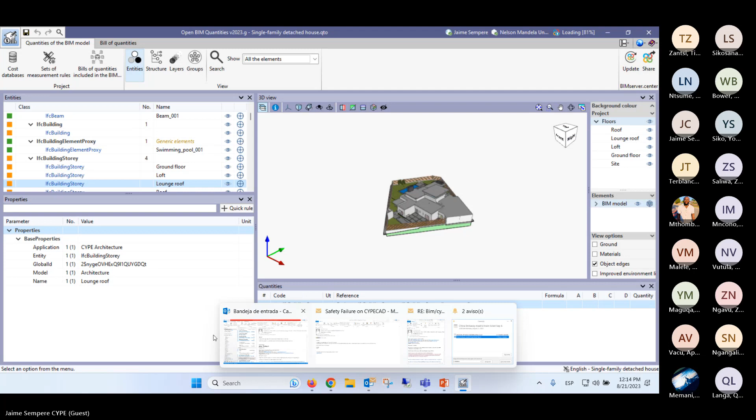There are different ways for you to reach what you want to do with this software. I was having a bit of issues with this other file being loaded - the one of the actual site. Three minutes ago, I was able to load this other model, which is the BOQ, now loading actually, but I've had a little bit of issue loading the drawing.

So I'm going to show you IFC Uploader, because this is a program that's very simple. If you have anything that you need to load into a modeler onto BIM Server Center that is coming from other software, a common file such as an IFC file, but also PDF, GLTFs, etc., you're able to do that here.

You see, I have here all of the projects available for me to link to. And here in the Nelson Mandela University sample, I can go ahead and add content to load into this project directly from here. And I could call this here site image. It says contents have been added correctly.

And we have the BOQ that has been fully loaded here, the detailed price bill of quantities. So you see, in this time that we've been here, we've been able to load a couple of samples, and then afterwards just review that information here.

Now, BIM Server Center also allows you to view your files in augmented and virtual reality, and that's something that is very important for you to be able to go out to a job site and get a project like the one that I'm going to show you here, and you're going to be able to visualize any of the parts of the project on site.

You see, like here, I have a project where they've already done the structure. I've loaded this project into BIM Server Center of the outer skin with all of the safety features that I have planned for the project. And now I can go out to the job site with my cell phone or my iPad and visualize this previous to ordering anything, making sure that this is the correct design.

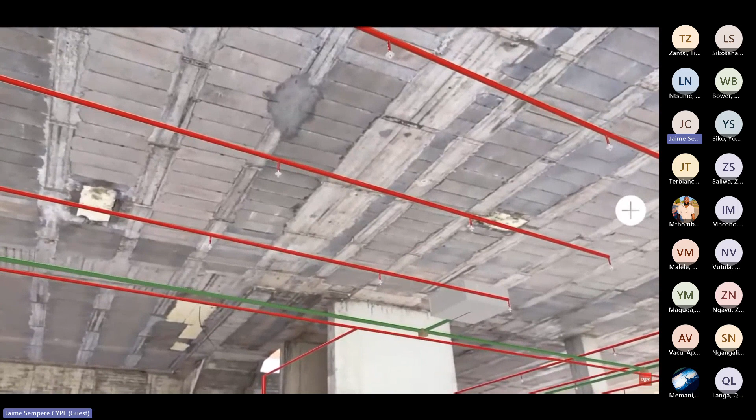With the MEP installations, also the same thing. You're able to go out there and visualize the whole design and see if it's going to work for you.

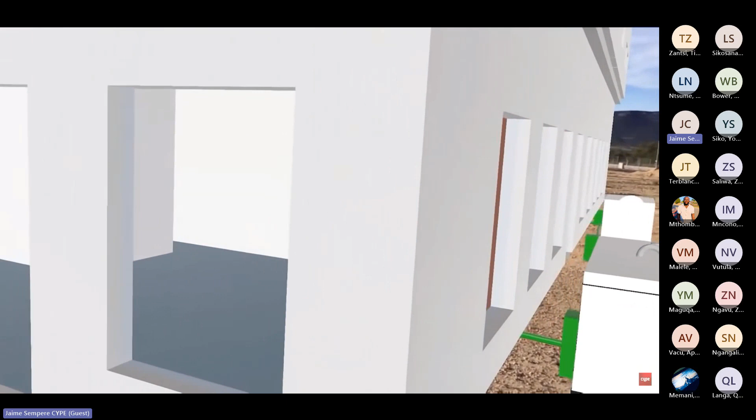It's a BIM, building information modeling, and it gives you the sizes of the perimeter of the fence. It gives you the information of the model of the equipment. Any information that you have entered into the project during the design stage will be available. You're even able to, once you locate where you're going to visualize this, walk inside and visualize the location of everything.

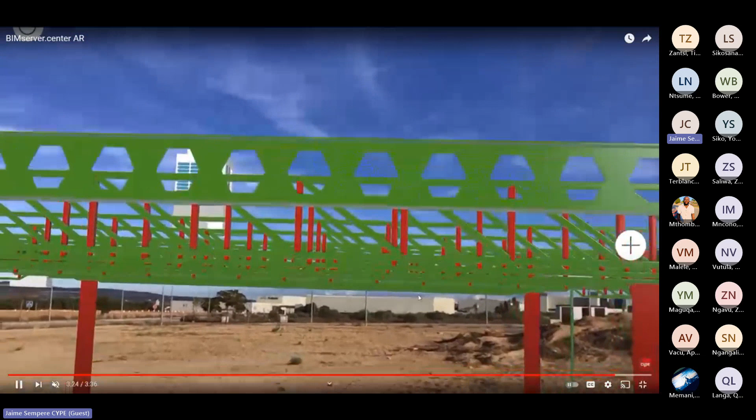And you're able to see the thicknesses, etc. And obviously, you're also able to check if you're going to be placing a pool or any particular structural elements that might be exposed. Make sure that this is the right location, the right placement for whatever your local needs are, whether it's technical, seismic, or just your preference of how you want to locate the project.

I've been working live, so sometimes the computer that you need to use is not very powerful. I'm working on a laptop, and you're able to open many files at the same time. So there can always be some drawbacks. We've only been connected for a short time, and I'm working off of Wi-Fi, but it is a software that I think can give you a lot of very interesting solutions,

not just as a student. This is obviously a tool that you're going to have in your toolbox to be able to access many customers around the world that are using this software, where you can go and tell them, hey, can I offer you BIM engineering? Can I offer you construction service? Can I offer you project management services? Or can I offer you project safety services for your design?

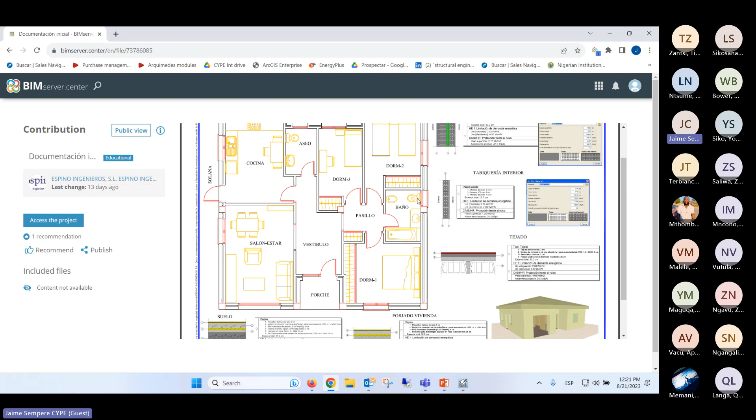Okay. But this is also a solution where you're going to be able to access the plans that you've shared on the cloud. And as you get more experience, look at the quality of plans that this gentleman is generating. When we generate plans with this software, they're also smart plans, in that they have smart tags. They're able to recognize information and automatically generate plans by themselves. Okay. The limit of what you can do in here is massive.

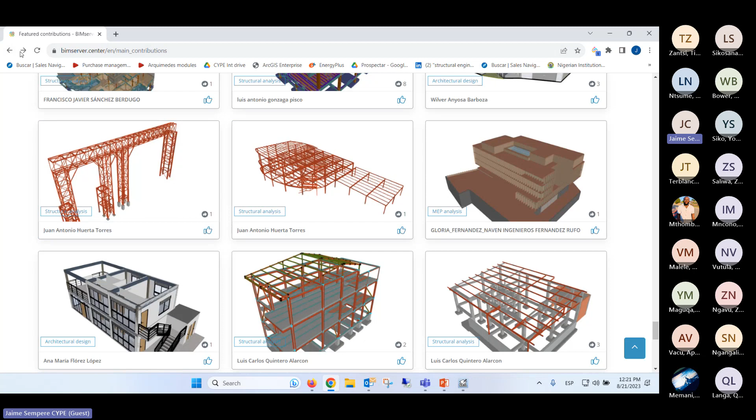Everything from, for example, this is a billboard, a scaffold, just a sketch drawing. This, for example, is a copper mine, a plant, here. So there's all sorts of information that you can generate and see from here, and it's actually useful things that are going to help you in the future as a professional. So I really think that it would be interesting for you guys to review a little bit about BIM Server Center and these tools. Well, actually about this workflow, my mistake.

Now, regarding the tools that we offer you completely free, if you go under cype.com, the tools that I showed you today, you go into the area of architecture, and you will see you have here CYPE Architecture, you have OpenBIM Site, and you have BIM Bill of Quantities. These are the three tools.

One of the great things is that we have a ton of learning resources for you. If you go into the section that says more information, you will be able to see detailed information of this program, like step-by-step guides of the work environment, the sketch drawing, how to create jobs, how to link, how to import, how to turn on snap features. Pretty much everything is done.

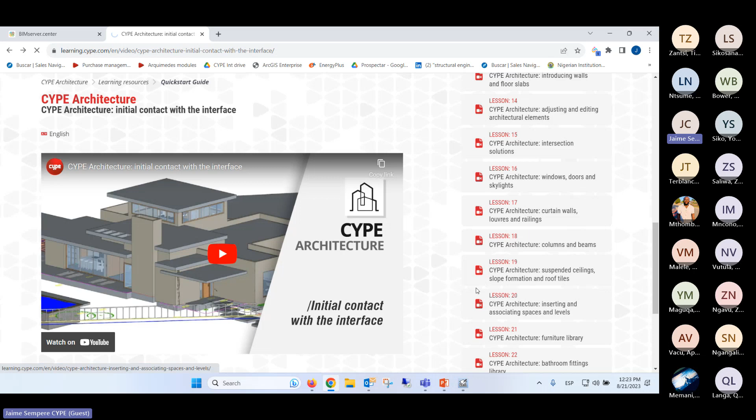But what I like, and I think is more interesting than other things, is our quick start guides. In most of our software, we have a series of sequential videos called quick start guides. They start from the initial contact with the interface, downloading, just basic stuff. This is not a very complicated solution. It's only 24 lessons in this software, and they're all about 5 to 10 minutes. And if you need a deeper dive, you're also able to go into the tutorials or the user's manual.

In the user's manuals, you press English and you would have not just how to install and download any of our software available for you to use, but also a 3D environment user's manual, as well as the CYPE Architecture user's manual, that you could go through, and you will see that it is quite simple and easy to understand. Everything has an example with a walkthrough through the interface, etc. Okay.

And that's pretty much the same with the other solutions, okay? When it comes to OpenBIM Site, and when it comes to OpenBIM Quantities, you have the same type of videos, the same type of trainings. And like I said, all of the solutions, you're able to use them completely free of charge.

Now, Professor Joan can decide what are the steps. I think the best thing will be if, based on what your students have seen, they can say, okay, well, we want to do a deep dive of CYPE Architecture, or we want to do a deep dive of site and architecture, etc. And then we can coordinate it, and the next lessons we can do them based on that.

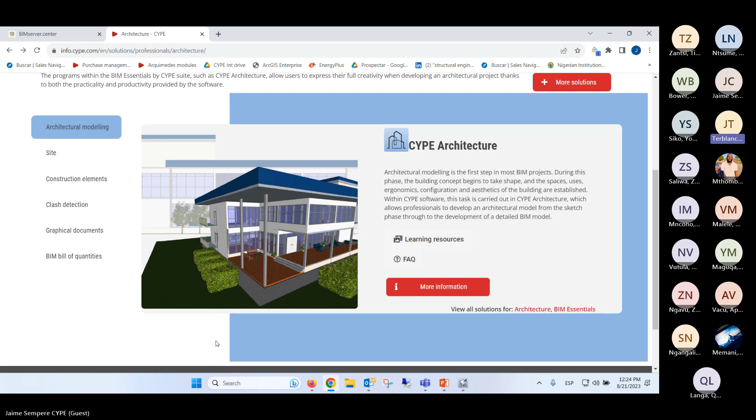What do you think? That sounds good, because we're mainly dealing with construction managers here. So the ones that are really useful here will be the ones based on clash detection. That's also a big one. And then, of course, the scheduling of the work. Well, the great thing is that we can use the clash detection, not a problem, okay?

And then if you want to go deeper into project management, we can go deeper in it, because when we work in cost management, once we do this OpenBIM Quantities, this BOQ that we generate with the program I told you, we could go further with a program that we have called Arquimedes and Job Control. And here we have many job control tools that we can work with based on that model, on that BOQ that we've done.

And we could do everything from the financial control, purchase control. We could also generate a Gantt chart of the project, which I know is very useful for students as well. Okay, so we could go farther in this part as well, and even design the safety features of the project if needed also. That's very useful.

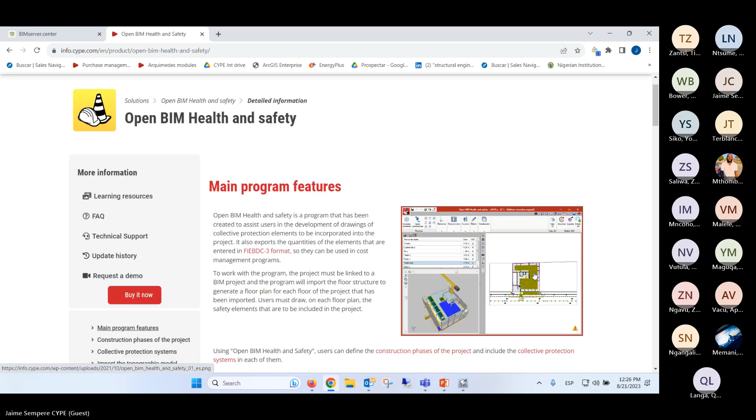But what's the feeling of my class? What else would you guys like to hear? So we're going into the project management side, the costing side, the safety side. Those are the important ones. What else do you want to add from your side? I assume that no comment means they agree with what we discussed here. Yeah, sorry, my voice is not very good today. No problem. Right, because there's a lot of work to actually go through here and play around with these programs, familiarize yourselves with them, and actually get a feel for them.

And please feel free to reach out to us, because all the technical support and the help and the assistance with using the software, everything is there for you. Any more questions from my students?

No, they seem to be happy or totally overwhelmed. Or the two. Or hungry. It's nearly lunchtime. Well, anyways.

Then I must say thank you very much. No, thank you, everyone. And I will set up another one for us next week, Monday again. Okay, perfect. I'll be in contact with you. Maybe some people are a little bit shy, so if anybody wants to send an email and let you know, then you could tell me exactly what you prefer for next Monday. But like I say, it's on the project management side, the costing side, cost control, programming, and clash detection is always a big one for me on projects also.